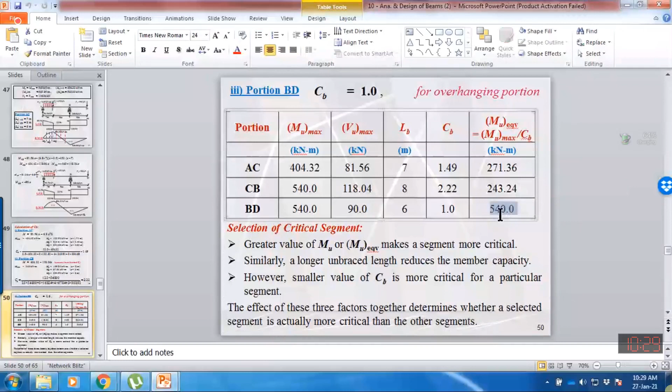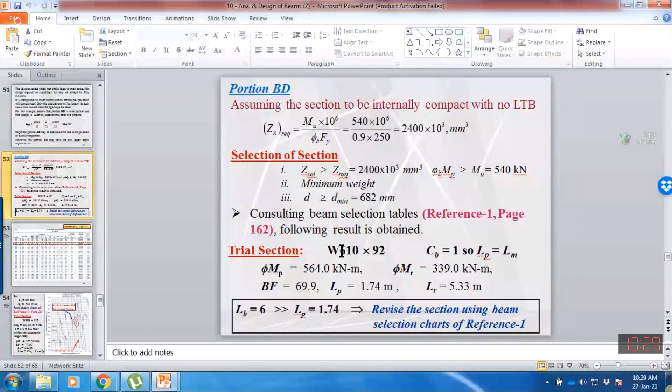For example, applied bending moment is 540 and maximum shear force at any point in this beam is 118. When we selected the beam section based upon this moment of 540, we selected this section: W690 by 125. This section is selected based upon the maximum bending moment.

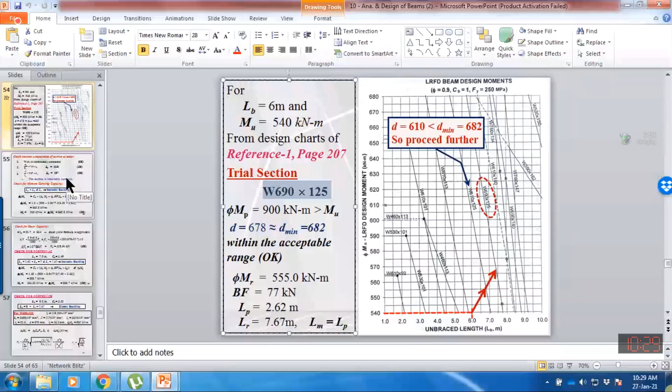So when we selected this section, the moment carrying capacity of that section was 665, which is more than our applied bending moment. So the bending check is okay.

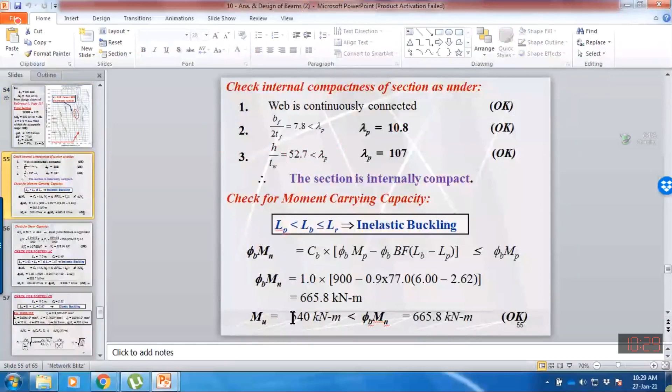But when we check the shear capacity of the same beam section, the shear capacity comes out to be 1070.9, but our applied shear is 118. It means the shear capacity is almost 8 to 10 times more than the applied shear, so the web is too strong as compared with the maximum applied shear.

It means we have excess web area. We can reduce the web element or web thickness to optimize, but we cannot do it here because this is the hot rolled section selected based on bending moment. If you want to select a section having shear capacity of maybe just 150, more than this 118, that section will not satisfy the bending moment criteria. So in this case, we cannot optimize this.

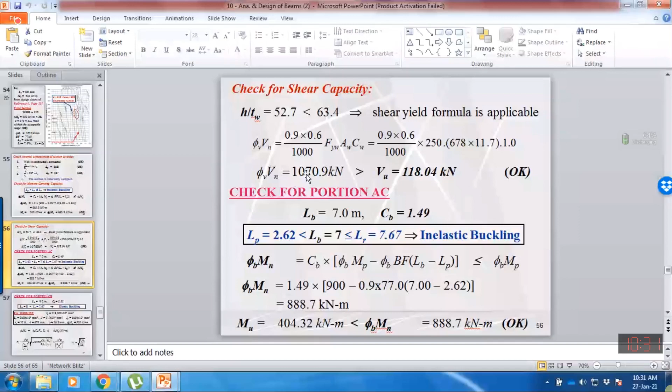We have to select or use the same section. But in case of the plate girder, we can design the web as per our requirement. We can use a thinner web, and by using a thinner web we can reduce the weight of the plate girder and also achieve economy because we are cutting the metal.

Okay, one example I will give you.

For example, we are having a plate girder whose depth is 1 meter and length is 10 meters. Instead of using thickness of web as 10 millimeter, if I'm using 6 millimeter, it means I have saved 4 millimeter thickness, multiplied by the length and depth of the plate girder. So this much volume of the plate girder we have reduced. If this volume is multiplied with the density of steel, we have saved too much material. So the structure will be economical and the weight will be less. If weight is less, the end reaction on our column will also be less, so the column will also be economical.

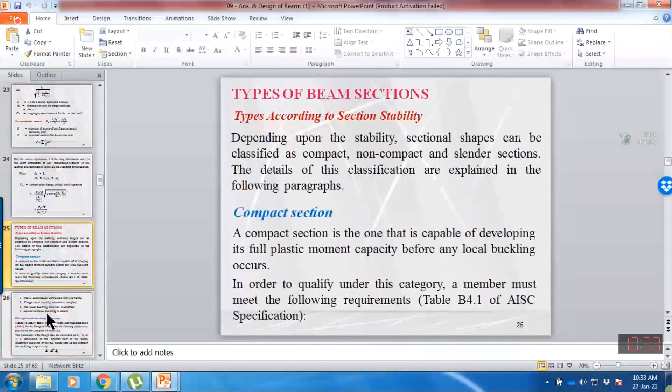When we studied the definition of the compact section in case of the beam, I gave you four conditions, and I will give you the overview again. We studied the four areas for the compact section: web must be continuously connected, there must not be web local buckling, there must not be any flange buckling, and unbraced length should be less than LP. So there were four conditions to classify the beam section.

So beam section may be compact, non-compact, or slender. For flange local buckling, we are having two values, lambda p and lambda r value.

In case of the hot rolled beam section, web is continuously connected with the flange, and lambda f value is less than lambda p. We are having two limiting values, just like LP and LR. Similarly, we are having two limiting values for the flange, lambda p and lambda r. Similarly, for web local buckling, we are having lambda pw and lambda wr.

In case of the hot rolled section, flange is always compact, web is also compact, meaning lambda F and lambda W are less than the corresponding lambda P value. So the class of the beam section may only change due to the lateral torsion buckling criteria or unbraced length. If unbraced length is less than LP, our section will be compact. If unbraced length is more than LP but less than LR, our section will be non-compact. If unbraced length is more than LR, our section will be slender.

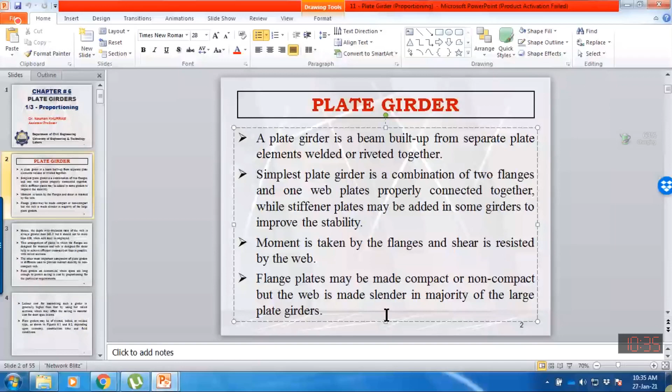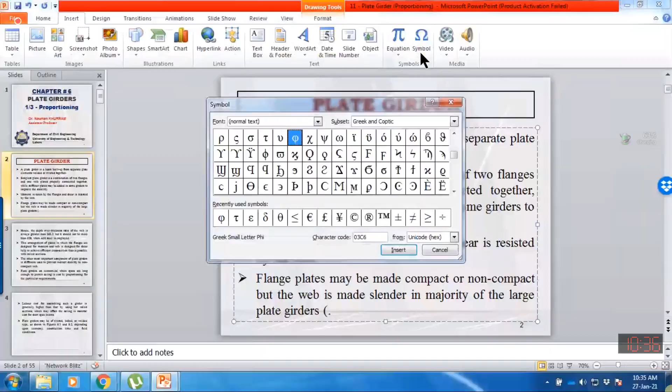If I want to simplify, for example, if I am having the lambda value, so lambda of the beam section, or flange lambda, will always be less than their corresponding lambda r value. I will explain this when we are computing the formula. So the flange may be compact or non-compact, meaning our plate girder may be compact or non-compact based upon flange local buckling criteria. The hot rolled beam section is always having a compact flange.

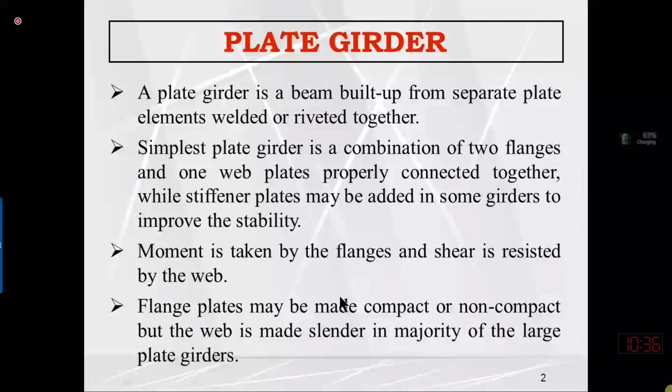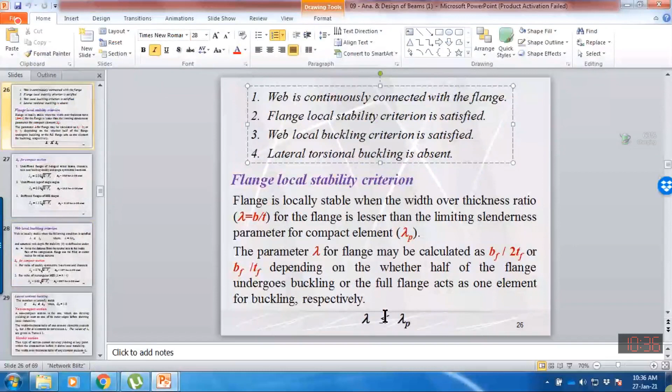Similarly, in case of the web, for the plate girder, our web will always be slender. In case of the hot rolled section, lambda W is less than lambda P of the web, which is maybe 3.76 root E over Fy. So this value is lambda P. Similarly, we are having a lambda R value for the web also, which is different, that I will show you in the LRFD reference.

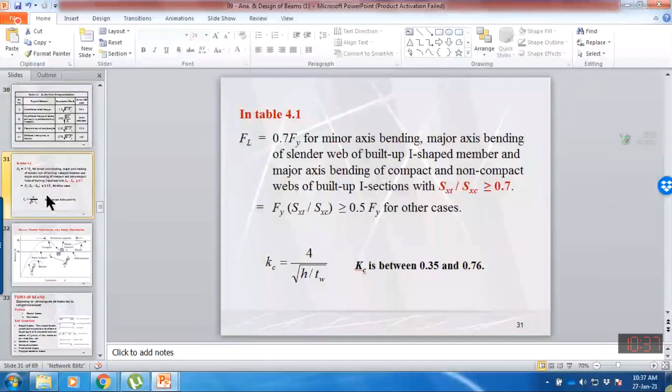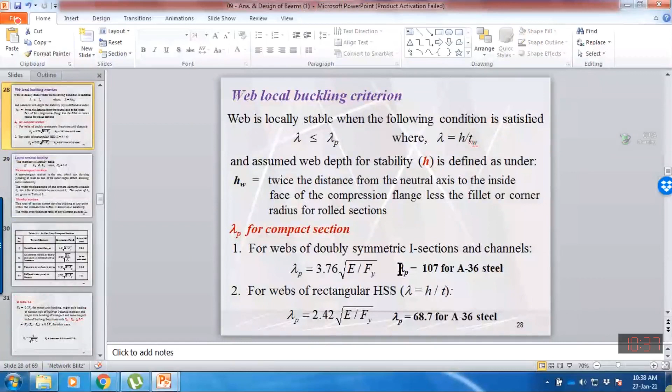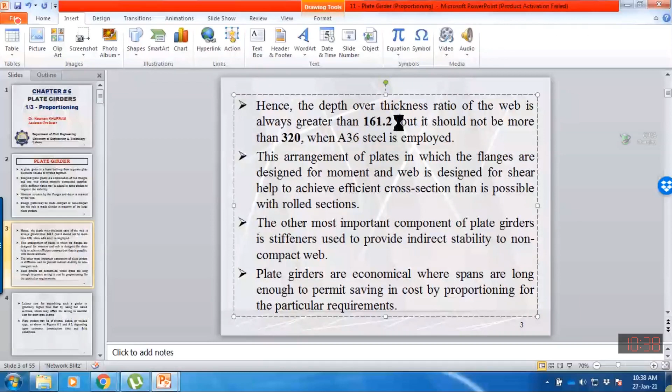It means it is very thin, which implies that the web will always undergo elastic buckling. So the depth over thickness ratio of the web is always greater than 161.2. So I can say that lambda W is more than lambda R value, so our web will always be slender.

So based upon web local buckling, our web will always be more than 161.2 for A36 steel. The actual expression is 5.7 times square root of E over Fy. So this can be approximately written as 161.2.

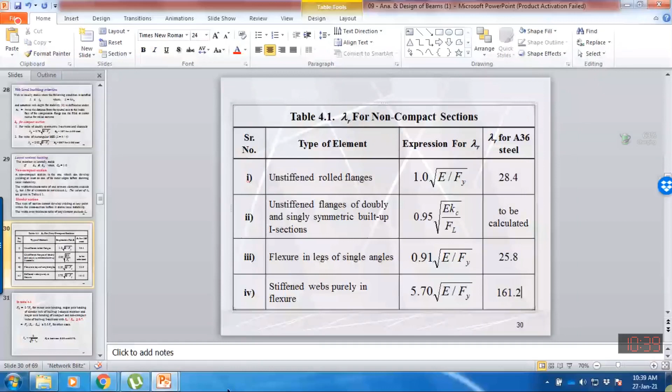So what does it mean? It implies that our plate girder section will never be a compact section. Our plate girder is always non-compact, because the first condition is not satisfied, since the flange may not be connected thoroughly with the web if we are using fastener type connections. But if we are welding the web plate with the flange plate thoroughly throughout the length, then based upon the first criteria, our plate girder may be compact. Then the flange plate may be compact or non-compact. So our section, being a plate girder, may be non-compact based upon flange local buckling.

Similarly, based upon web local buckling, our plate girder will always be slender. Why? Because we are keeping the lambda W value more than 161.2. But this value will always be less than 320 because we do not want to use a very thin web. So lambda W, which is height of the web over thickness of the web, will be between 161.2 and 320. Where we are getting this 320 value, I will explain in upcoming slides.

Arrangement of plates in which the flanges are designed for moment and web is designed for shear helps to achieve an efficient cross section than is possible with hot rolled sections. Efficient means we will have an economical section, meaning we will have the flange dimension as per our requirement and web dimension as per our requirement based upon the shear force.

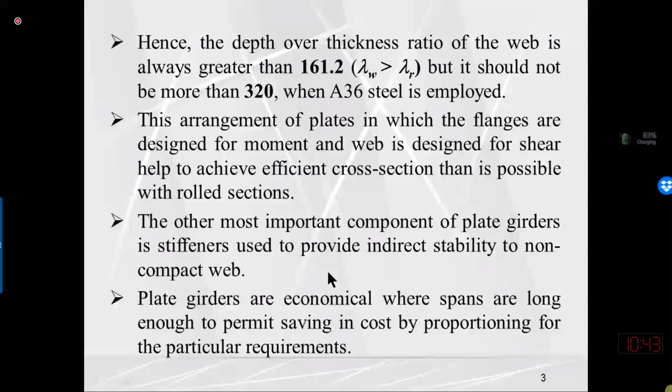So labor cost for assembling a plate girder is generally higher than that of using a hot rolled section, which may offset the savings in materials. Labor cost is a little bit more in case of the plate girder compared to the hot rolled section, because we need to weld the two plates, cut the plates, and then weld or connect them with fasteners. So extra labor cost is involved, meaning the material we are saving by optimizing the section may be compensated by the labor cost.

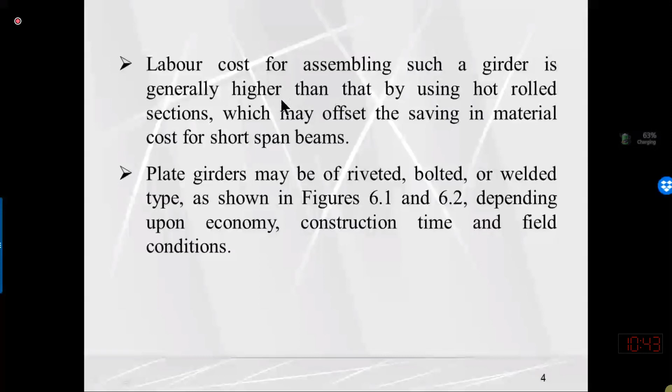But anyhow, what advantage do we have? We can reduce the overall weight of the structure. If the weight of the structure is reduced, a lesser load is transferred to the column and the foundation underneath.

Why are they using three plates? Maybe the total flange thickness required is 30 millimeters, and in the market we do not have a 30 millimeter thick plate. Instead, we have a 10 mm thick plate. So we can use a combination of three plates to achieve the total depth.

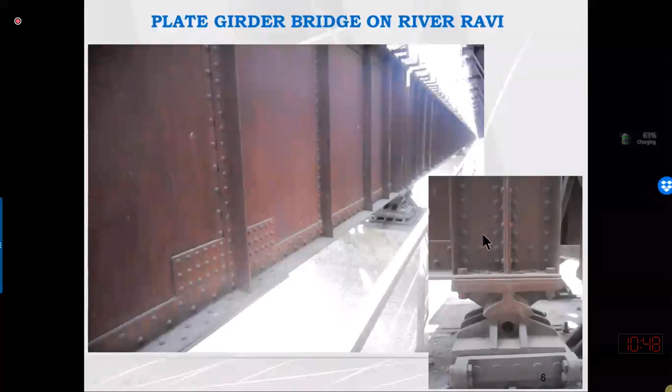So this complete portion is referred to as a bearing. Why? Because the support section is very heavy or concentrated. So to avoid the crushing, crippling, or stress concentration, we use plates in combination, or we need larger or thicker plates to resist the end reaction here.

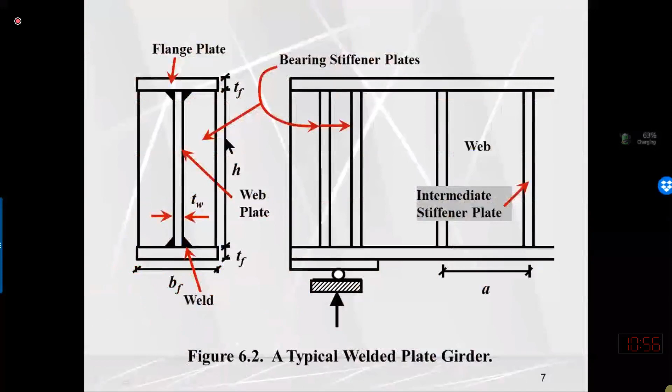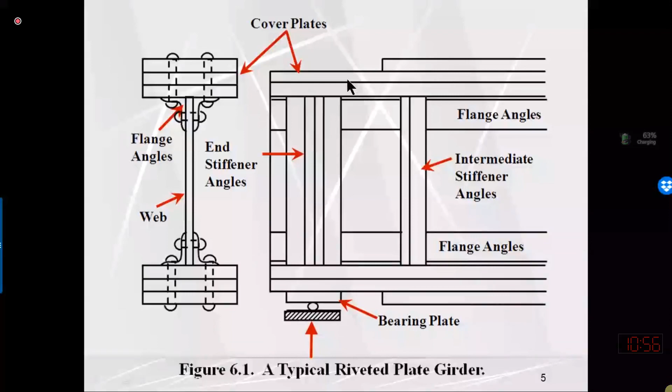Another way is that if we don't want to reduce the thickness of the flange, we can reduce the width of the flange by keeping D constant. So maybe at this point we have a larger flange width, and at this point we will have a lesser flange width. Otherwise, if we do not want to change the flange dimensions Bf and Tf, we can reduce the moment by reducing the depth.

But we have to use some minimum depth here. It doesn't mean that moment at the end is zero, so depth will be zero. We need some web depth at the end because at the end we are having shear force.

So we can also optimize the plate girder based upon the shear force and bending moment diagram along the length, and similarly compute the depth of the web using this equation. We can equate the applied shear with the shear capacity, and we can assume that...

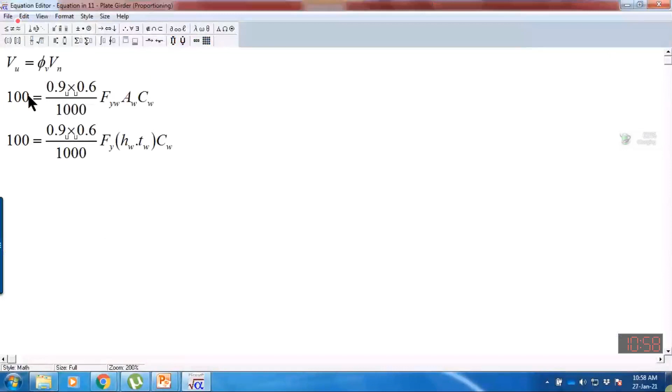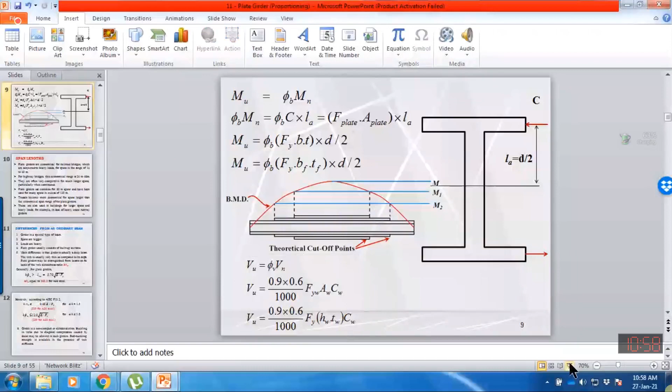So we'll see this formula. The web dimensions are mainly based on many criteria, but I will give you one idea. If we know the applied shear and the yield strength, we can compute the area of the web using this equation, as per our requirement.

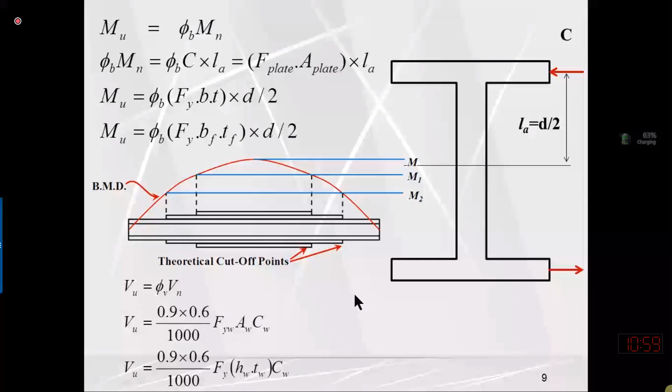This is the last slide I will cover today. Plate girders are economical for railroad bridges subjected to heavy load. For example, on our canal road you can find a lot of railway bridges. Even though the span is less, maybe the canal is not wider than 10 meters, maybe 30 feet, due to the very heavy load we need to design the plate girder.

For highway bridges, if the span is more than 24 meters, we also go for the plate girder for economic consideration. They are often very competitive for longer spans, particularly if the spans are continuous, because in a continuous beam the bending moment is reduced. Maximum bending moment is wL square by 12.

In the simply supported case, the moment will be wL square by 8. So if the load is very heavy or the span is very large, we need to go for truss bridges, because in a truss we can achieve larger depth, and using this skeletal member we can save a lot of material.

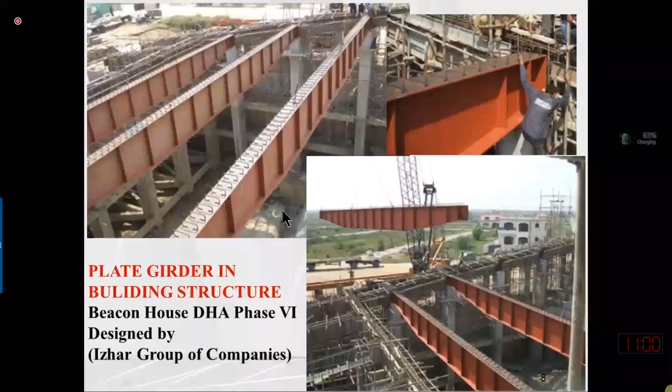Plate girders are also used for building structures if the span is larger. A typical example is shown here. Next time we will start from slide number 11. If anyone has any question, they can ask me.